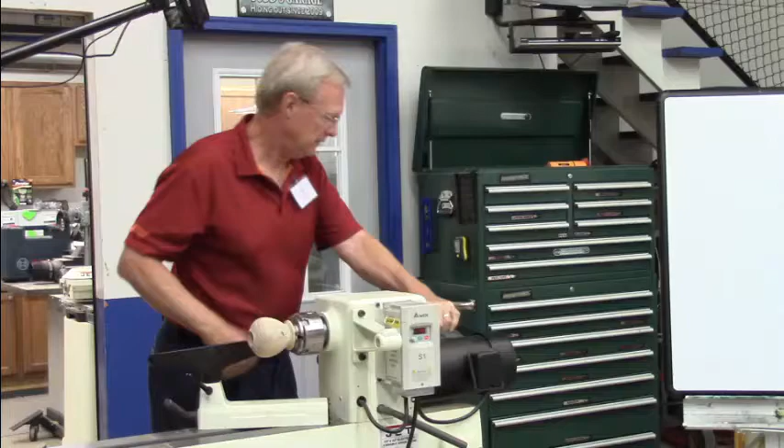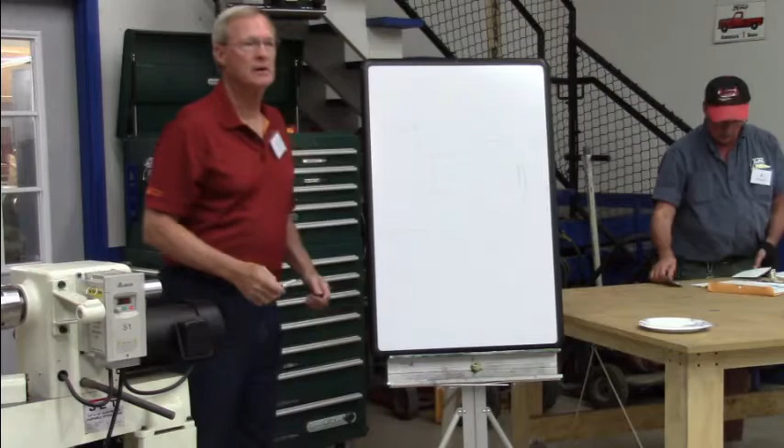What we're going to talk about is hollowing from a, that's your lathe spindle, something like this maybe, with a small hole. Okay? And it doesn't matter the shape. What we're going to talk about applies for everything from a Christmas tree ornament to the things Dan Chevalier does that are this long, hollowed out. So the rules or the tips are kind of the same for everything. So keep that in mind.

The biggest thing is the tools are different. You do a Christmas tree ornament, you got a little tool, you do what Dan does, and they're what, 1.5 inch bars? 1 1/4 inch? Yes. You know, they're huge. So what you're determining is the size of the vessel and the size of the hole. Other than that, everything else is pretty much the same.

Okay? It's intimidating. I've had 2 people already tonight say, I'm just afraid to stick a tool in there. And it is the first time you do it, but nothing bad's going to happen, usually. Yeah, sure.

That makes sense. So what we do to start out with this is you get your shape. Okay, so you put it on the lathe to get a rough shape, whatever you want. Not a rough shape, but it ought to be pretty close, because now you're going to come in and get your final thickness roughly. So what I do is I start out and bore a hole determined by the size of the piece. I make it as small as I can usually. And usually you can drill it out with a Forstner bit.

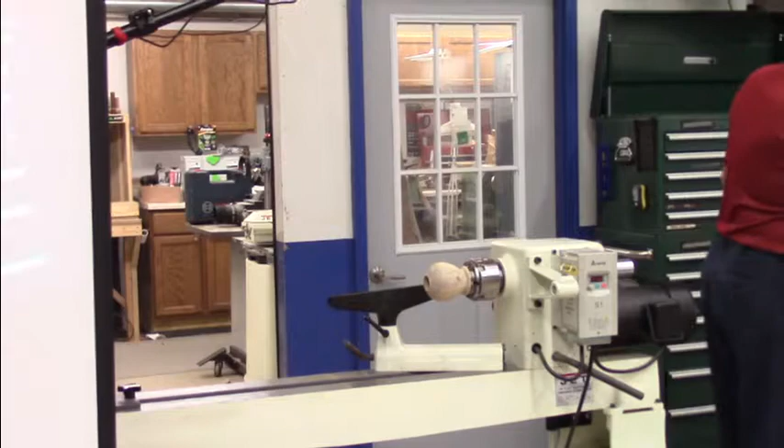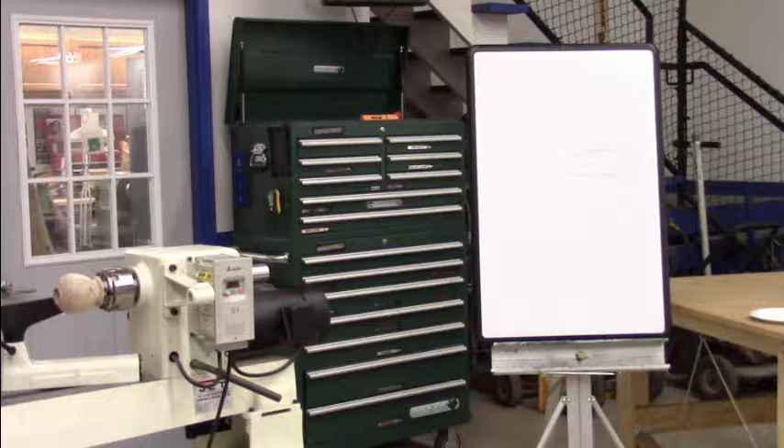So you have this drilled here, and then the next step would be to use a straight tool to widen this hole. So what you want to do is start widening that. And you'll use the straight tool as long as you can. This is like the one we made at that tool making day a couple years ago. That's just a straight tool with the scraper on it, sharpened. Are you looking at these? I think that's even on.

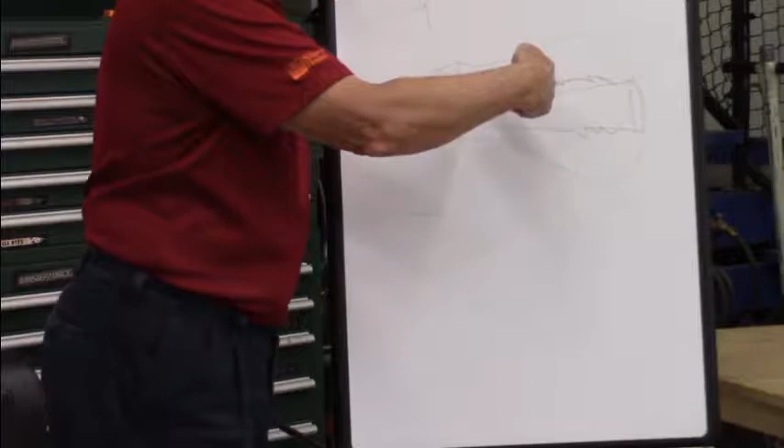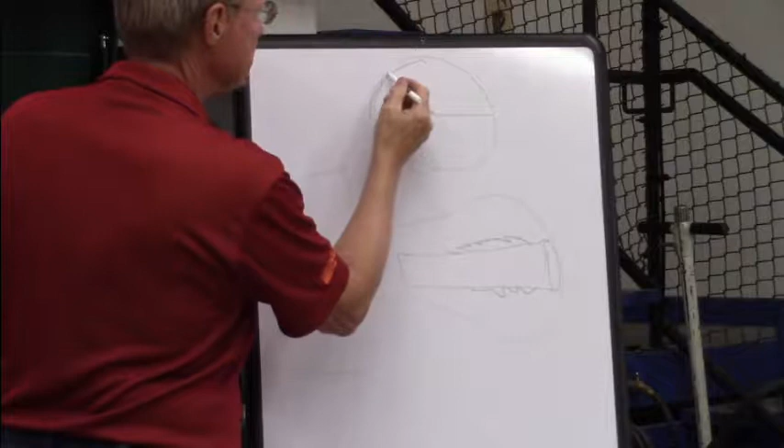But you know, go in and scrape. This is almost always going to be end grain this way. So when you're inside, you're always turning end grain. So it's not that hard to do. Okay? So you're scraping. So just like with anything else, you want to be above or at center. So looking at it in here, if this is center, you want your tool to be here or above. So as the object is turning, it's going away from your scraper. Down here, it's coming into it. So you want to be at or above center, and you just start doing it. Okay?

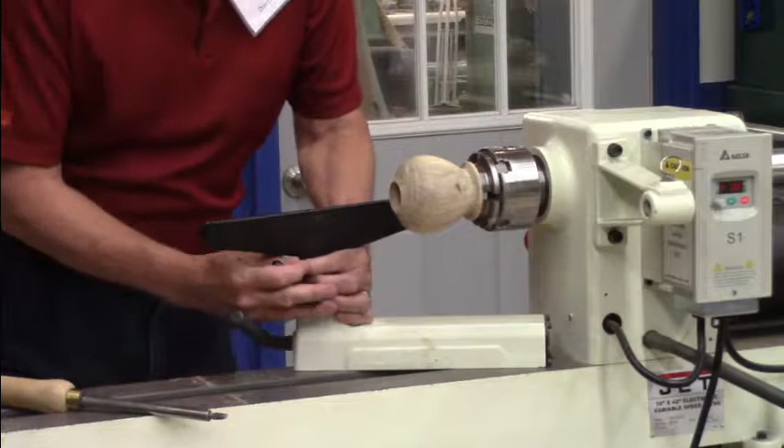So I'm not going to do a whole lot of this because there's more fun stuff later on. And you can't see what I'm doing yet. This is one time that we have no advantage over Michael.

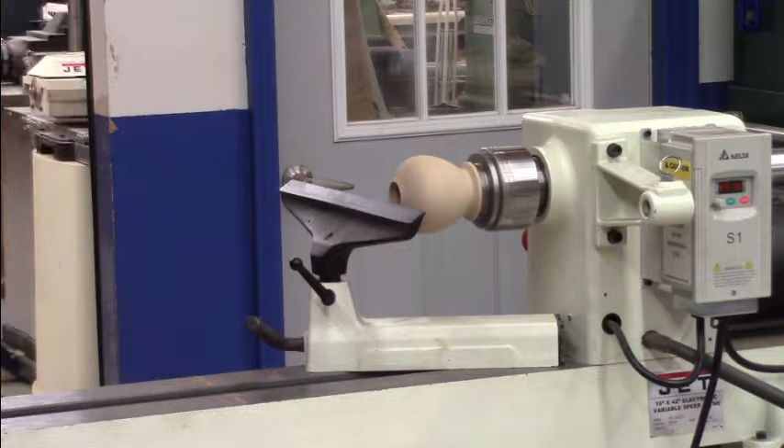Okay, so this hole in this one's ridiculously big. My tools that I use most of the time are these Trent Bosch, and they're 3/4 inch, and they're pretty good size. And I kind of wanted you to see this. But, you know, this is what they are.

Garden hoe or lathe tool? It is the coolest thing, I'll tell you what. It just makes you feel like a man when you pick this up. That's why I brought it.

So anyway, I wanted to straighten it in. Okay, so we're going to come in with the straight tool. So we're trying to widen what we drilled out. And the straight tool is the easiest to use. And then you get to a point where you're starting to cut chips instead of the piece. So you start to get vibration and you have to get that out of here.

So, you can blow it out with an air compressor, which shoots it all over everywhere. You can suck it out with a shop vac. And since we don't have any, I just use this, especially for Christmas tree ornaments.

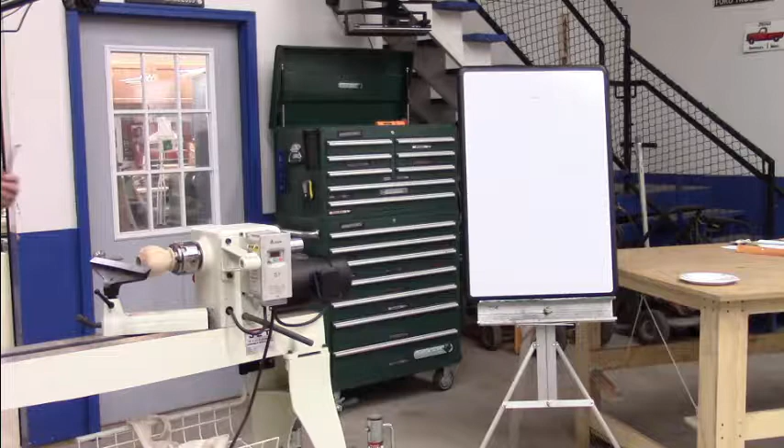So, okay, as you get into this, especially with bigger pieces, your chips, when you get down to here, and this is opened up, your chips are going to end up in here because of centrifugal force. You have to keep emptying that. And another thing I do is I made a couple little scrapers. I don't guess they're scrapers. Shovels, I don't know what they are. That I can just reach in and pull stuff out.

Because when you're really doing this, it's bigger pieces, it's chips. And if your wood's at all wet, of course, then you can drag it out and then blow it out and so forth. But you have to do that. Because when you get to the curved piece, what happens is you're down here cutting, all your chips are here, and you can't get your tool out. Literally can't get it out.

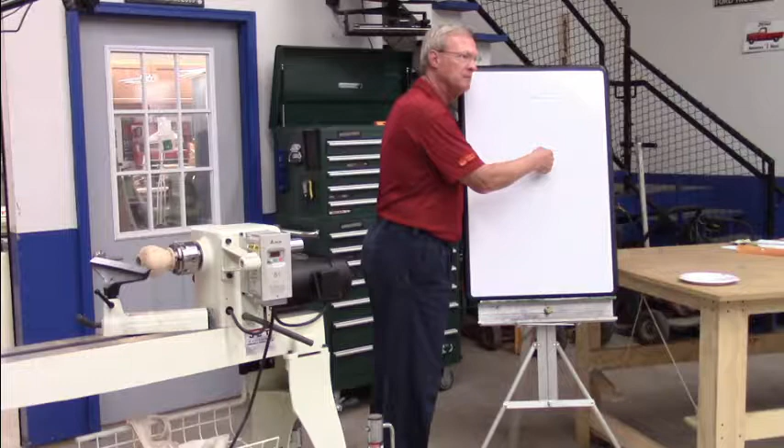Blankenship called me one day and said, Don, I'm doing a hollow form, I can't get my tool out. And I said, Michael, the only way I know to do that is take it off the lathe, beat it with the hammer, and take it out. He said, it's a beautiful piece of wood, I'm going to keep it. You figure out a better way to do it, let me know. Hour later he called and I said, you got it out? And he said, yeah. I said, great, what did you do? Took it off the lathe and beat it with a hammer.

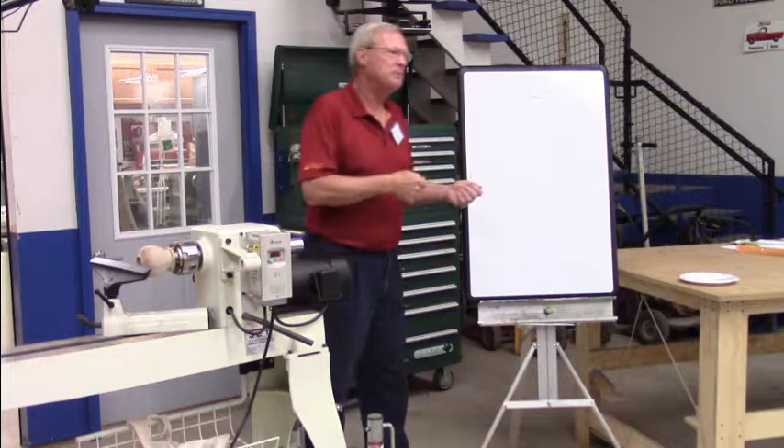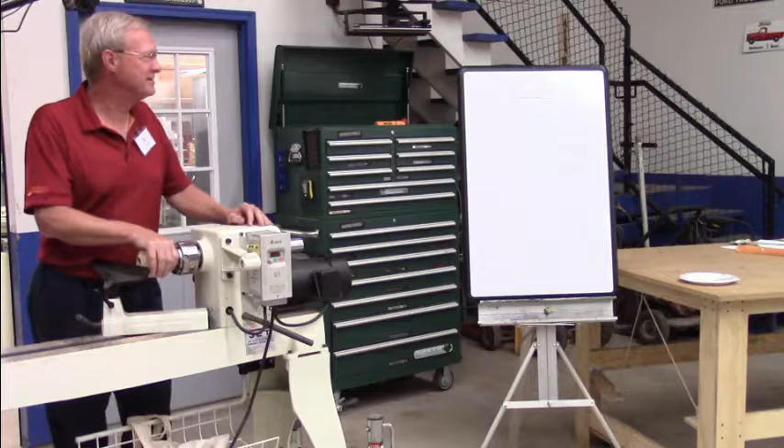So, seriously, it builds up quickly. More quickly than you think. You feel like you're always blowing chips out, and you have to stop. But what happens is you get in here and it feels good and you're really rolling and you feel like you're cutting, and all of a sudden you can't get that thing out of there. Ever happen to you, Dan? No, but I'm careful. It's a mess, and you can't get it out.

So as you're doing this, the main thing about this whole deal is knowing where the tip of this tool is. And really, it's just some experience with that. Sometimes I put tape here. I go to the bottom and I put tape so I know I'm at the bottom. And I'm going to show you a couple of electronic ways to do it. But that's the key. To be in, at or above center, flat. You don't want to be digging up. And that's why I like to do it by hand. I like to be able to feel what this is doing.

So also as you're doing this, you need a way to know how thick you are. There's different things for that. You have these things that show you. Todd was looking at this earlier. This is ridiculously too big, but I made this. Can you see this black here? When it's against the edge, the black is at 0. So when you put this in, it's really too big to work that well. When you get this in, there's how thick it is.

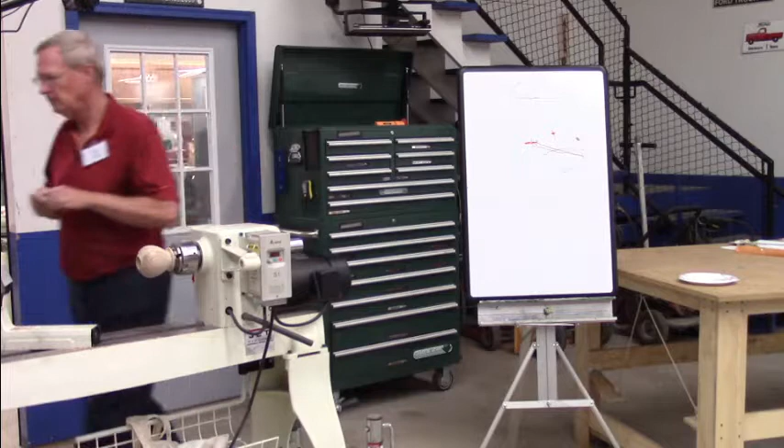Yeah, I have a whole bunch of tools. I have more hollowing tools than I do gouges by far, and I don't know why, but I just do. There's that many available. Everybody makes them. Of course, everybody's making gouges too, but they're definitely available.

Don, what's the limit as to reaching off the end of the tool rest into the piece? Well, Dan's going 18 inches. Well, I think I did 2 of them. One of them was about 17. That's a long ways, and it was a big bar, and I had the advantage the hole was big enough I could even turn the tool rest so I could get the tool rest in as far as possible. But it's a lot of bounce. And if you didn't have the setup, it'd be awful hard to do because it's really a lot of vibration.

With these 3/4 inch Bosches, I'll go maybe 7 or 8, and that's starting to get, like Dan says, pretty bouncy.

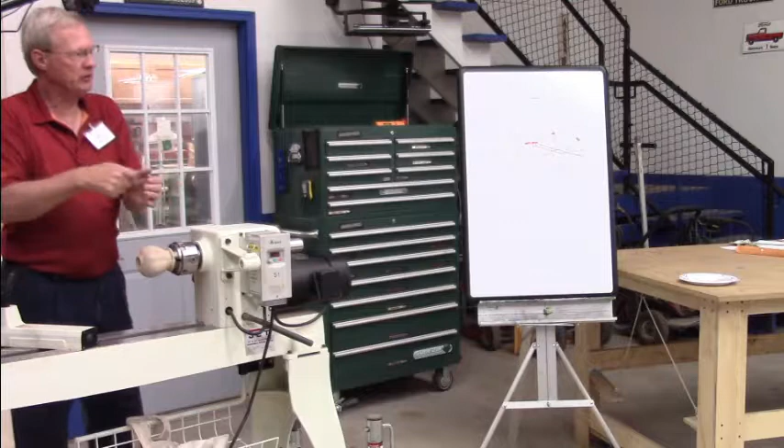Do you have a hollowing system, Don? I think Dan's got it. Dan, you've got one, don't you? I have a Jamieson that I rigged up myself. I'm going to show you one in a minute. Okay. I brought one. This is a Jamieson, this is Mel's. Dan has a Gizmo, which is the premier. His is articulating where the arm swings on itself. And these are called captured systems. We'll talk about that in a minute.

But frankly, I've used Dan's. I've used John Anderson's, which was this Jamieson. I've used Michael Blankenship's Trent Bosch, and the one that I've made, and I just like doing it by hand. I'd much rather do it by hand, to a certain extent. Again, you can get to a size that you can't do it by hand. You really need to have the support, but if I'm doing something, I like doing it by hand.

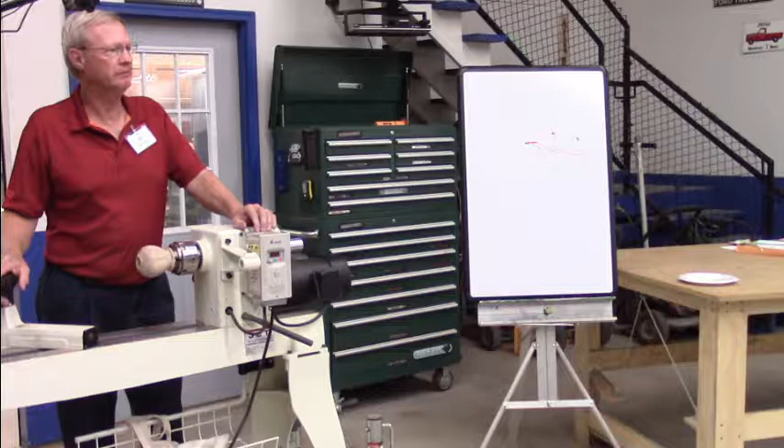Matt? You stick a bowl gouge in there or anything to go for it? I stick a bowl gouge in about that far. And that's to get this lip and get this round. And that's as far as I'll usually go with a bowl, on something with a small hole. So you're doing all that in a scraping actually? Yes.

Do these same principles apply with segmented turnings, or are they different principles? With a small hole, I think it's the same, scraping the inside. Joe, you could answer that better than me. Yes. Just use a scraper on the inside. And that's all side grain too, right? Yes, most of the time. Yeah, so it would be the same.

The way to practice this is make something like this and just make a big hole. Or even when you're doing a bowl, get out your scrapers and do it. Use those tools and get a feel for it. Especially something like that, that's nothing. Anybody can do this. So, any other questions? Okay.

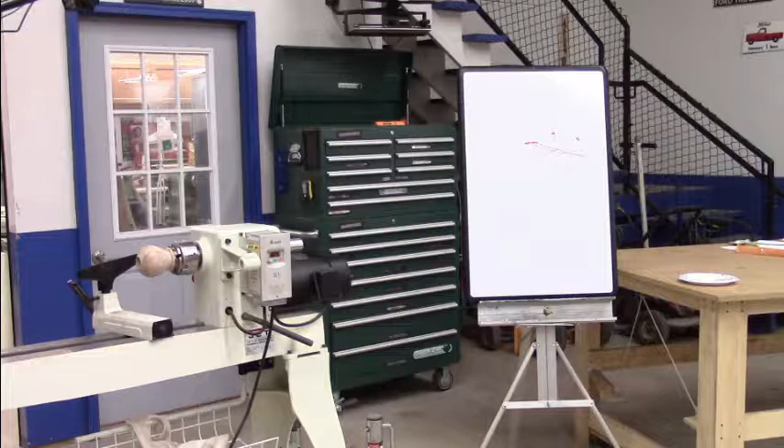All right, so this hollowing system. Screen it all. I don't know how far back he's going. Okay, this is the Jamieson, Lyle Jamieson makes this, and it's called the captured system because you can see why.

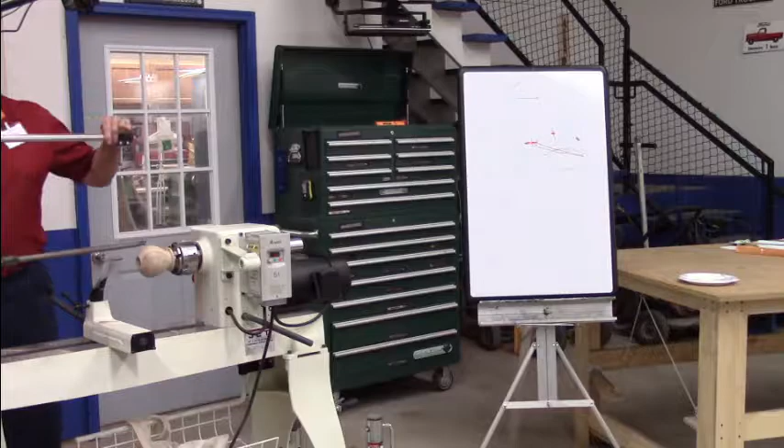Okay, so everything I said still applies. You want this at center or above.

Be sure to get this on film, because if it blows up, I want everybody to know. That's right.

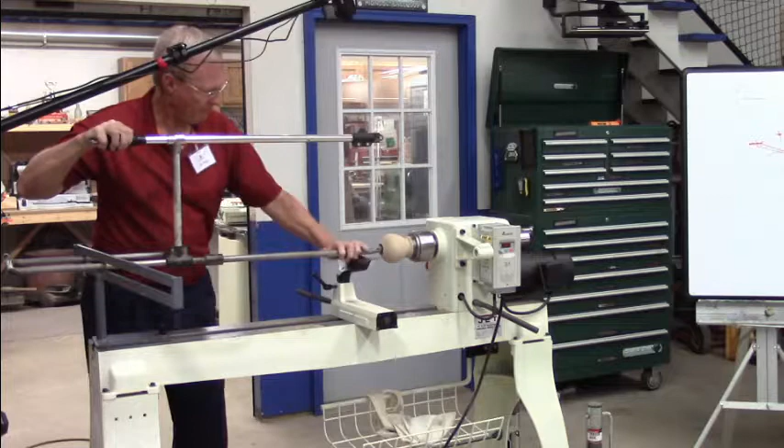Damn, Bill, that almost makes me want one. That's how it works, okay?

What this has is this little cup on it, which is still scraping, but it's got a cutting action too.

So how deep can you go with it, all the way back? How deep with this thing? Well, no, you can't go any deeper with this than you could holding it by hand. Maybe a little bit. I think you said there are 10 inches on that 3/4 inch, and on the inch part you can go 18 to 20, I thought he said. I'm almost positive, that's what I remember you were saying.

I just don't like fussing with it. It is easy, I mean you can see what I was doing, and that's what Jamieson says, I think his slogan is 'put the fun back in it' or something like that. Because it'll beat you up holding this thing. It's pretty heavy when you're standing back here like this, and it's work. But I just like to be able to feel it.

Another thing is, you see when it's sitting on the rest like this, a curved piece, you can't push it down. But if you get on this side of it, that's where you're going to get your torque and you're going to get messed up. So you have to have it on the straight part, and then it's no different than the straight.

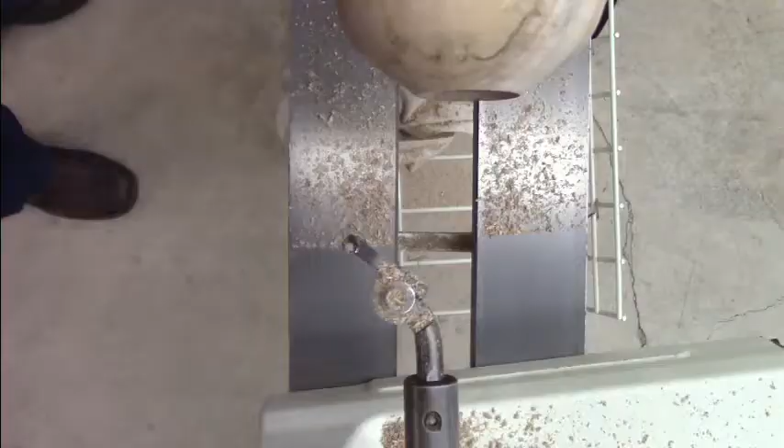Lose your Allen wrench. Show them how you're going to line that laser up at the point. Maybe you can get it on the overhead camera. What's it look like? It's showing your tip.

Yeah, okay, all right, okay. This could be interesting, guys. We're still recording, right? Let me check.

Okay, so when you're using the laser, every now and then, as your angle changes, you need to change that distance between the cutter and the laser beam as this moves. In this method, you don't have to do that.

So what we do here is the camera setup. Now remember, what we're doing is I've set my laptop right here and my little camera setup, so I'm looking straight at it instead of like this. So what you do is you take, there's the tip of the doodad.

Now is this going to fall off? Is that pretty good on here? It felt pretty good, okay.

So now what happens is you bring this in, and you can see right where the, okay?

Why isn't that where it's supposed to be? Is it on the thing? Yeah. It's not here on the camera. What? Oh, it is, okay. It's not on the camera, okay, cool.